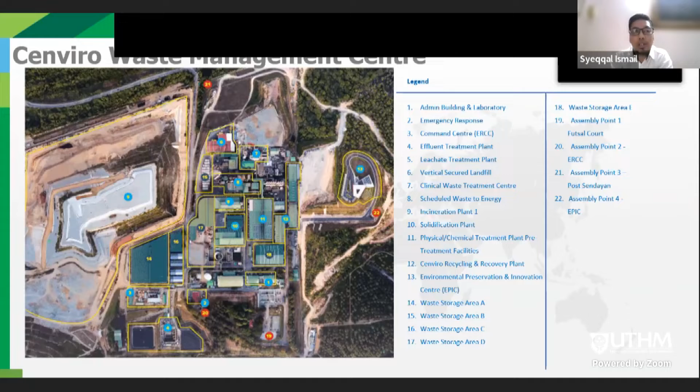And we are constructing 2 facilities. The first one is upscaling our waste oil recycling, and the second facility is our PET plastic recycling. Okay, that's all.

From company profile, any question?

Yeah, thank you, Mr. Syeqqal. I would like to ask you regarding the vertical landfill. Okay, because I also never heard that before. What does vertical landfill actually mean? And then the other one is the eco park.

Okay doctor, actually vertical landfill, if it's a normal landfill, we use airspace. So there's a piece of land, we dump the waste and then cover with soil, we bury it back. So after it's full, fully capacity, we can't use it anymore, because theoretically there's a certain height we can't exceed.

But because we cannot build another landfill in Negeri Sembilan, what we do is create a bund. A bund is like the Great Wall of China surrounding our landfill, the piece of land. We raise the wall high up so we can use the airspace.

76 out of 77, the largest facility in Southeast Asia. After that kita treat, kita storage, kita store, kita treat. So storage ni kita store dekat dedicated warehouse. Dia tak boleh, certain waste memang tak boleh terdedah kepada environment. Itu yang jadi sometimes terbakar, sometimes dia volatile. Ada waste dia volatile. Volatile means karakteristik dia akan meruap. Berbeza dengan vaporized, vaporized you introduce heat. Volatile dia meruap sendiri macam petrol meruap sendiri. So that one kita perlukan dedicated waste storage untuk itu.

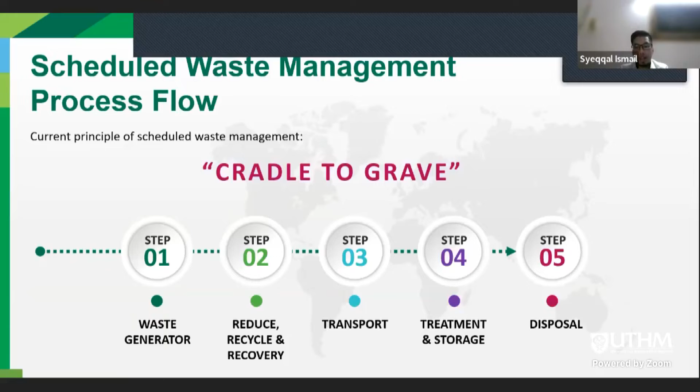And then after that, after kita treat apa semua, kita akan dispose ke landfill. This is example of scheduled waste punya facility in Malaysia. Saya ambil example is kualiti alam.

The waste generator akan try to reduce, recycle, and then they transport. Kalau waste tu on your left hand side, kalau boleh recycle, dia akan try recycle, baru dia transport. Tapi on your right hand side, kalau waste tu tak boleh recycle, dia akan straightly hantar kepada waste receiver. Receiver ni waste facility, waste treatment center. So residue daripada waste recycling ataupun direct daripada waste generator akan pergi ke waste receiver. Dia akan treat combustion tadi, incineration, PCT, neutralization, solidified, ataupun ada juga waste memang straightly pergi landfill kalau memang tak boleh treat.

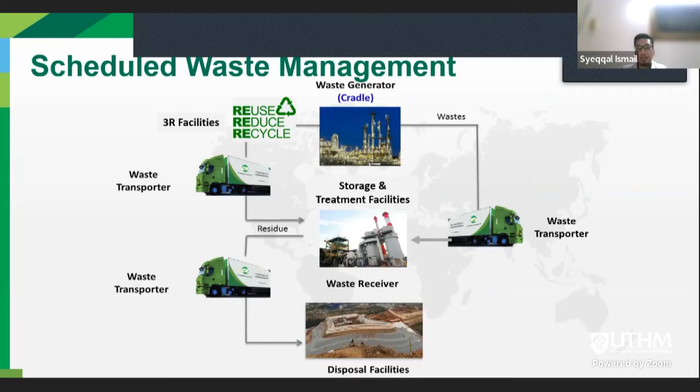After that memang kita akan hantar ke grave, ke kubur, tanah perkuburan, iaitu disposal facility, which is landfill. Okay, tapi currently we are transforming dari cradle to grave into cradle to cradle concept. Because waste generator ni bila dia produce waste, kita akan recover back the waste dekat on site. Means companies yang memang production is for consumer, dia tak payah fokus on recycle dekat facility dia, dia boleh hantar terus ke kami, ke Cenviro untuk kita recover back.

Kita akan buat the recovery, dan kita boleh tengok the economics of scale macam mana. Let's say the economics is good, maybe we can counter the price of cost untuk dia dispose, mungkin kita akan rendahkan. At the same time kita akan jual the recycle product tu kepada industri lain. So this is industrial symbiosis yang saya cerita dekat Dr. Mimi tadi. Kita try untuk recover the waste, kita try untuk reduce the cost of waste generator. At the same time kita buat symbiosis in industry.

So any other industry dia tak perlu untuk gunakan raw material. Sebab raw material ni let's say aluminium, kita nak mining bauxite. Bauxite tu dia perlukan energy, dia produce pollution. So currently my research and my planning for the future, saya akan extract the waste from aluminium, and we are extracting the waste and we provide back the alumina to the industry.

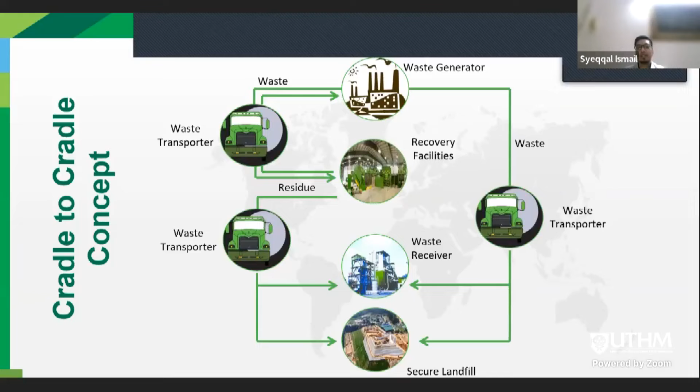That is the example, and after that we send it to the waste receiver, the treatment facility. Bear in mind, although we recycle and recover waste, it's not 100% recyclable, except organic waste. Since this is inorganic, there will always be some residue. For example, there might be other metals in the waste that we don't want to use, so we send those to a treatment facility like Kualiti Alam for them to treat and dispose of. This is an example of a recovery facility at Cenviro Recycling and Recovery.

So this is one example I'll give. The first one is waste oil recycling. We recycle lube oil - this is not waste cooking oil, this is scheduled waste. Lube oil, oils used in industry, like hydraulic oil at plants with mechanical parts using hydraulic mechanisms, we recycle that oil and produce, for example, reconstituted oil. This reconstituted oil is one of the fuels that CRR, Cenviro Recycling and Recovery, produces, which can be used for combustion. We can sell it to companies that use fuel in their combustion process.

The next picture is e-waste recycling. At CRR we partially recover the e-waste from, let's say, your handphone or laptop. Actually, in electrical and electronic devices there's gold, you know. So this is what we do - we recover precious metals like gold, silver, aluminium from your handphone, and after partially recovering, we send it for recycling to Shan Poornam in Penang for them to recover the components. Recycling turns it into another product, for example they produce an ingot, a gold bar.

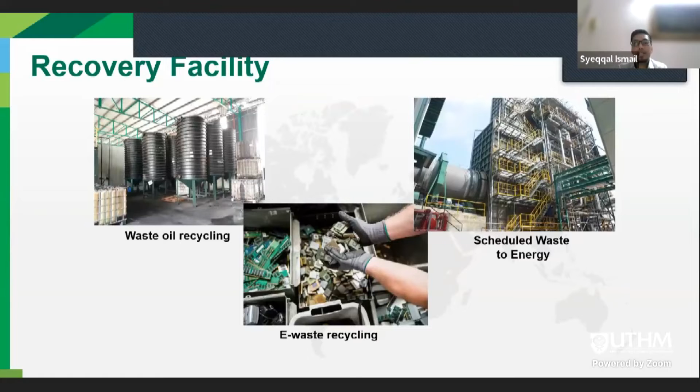The last facility is scheduled waste to energy, SWTE for short. This is, I think, the first in the world actually, because normally waste to energy internationally combusts MSW to produce electricity. But in Malaysia it's the opposite - we burn hazardous waste and produce electricity, and that electricity we generate is sold back to TNB for use in their grid, supplying housing areas so they can reduce their production of electricity. Because electricity production in Malaysia uses coal, which is not sustainable or environmentally friendly, we are trying to assist this to happen. We produce electricity and sell it to TNB.

Okay, this is municipal solid waste. This is actually the best thing, because I am a biochemical engineer, so my interest is in MSW, MSW treatment development. So from industrial sources they also produce MSW, residential like housing areas, and then commercial. Residential like your hostel can also be considered residential. Commercial like your campus, UTHM's campus, or a shopping lot - these all produce MSW.

So from this MSW, what can we actually do - we can recycle the recyclables. For instance, you can see there's aluminium cans, glass, paper - these are recyclable. Composting is actually a process for food waste, since food waste is organic and can break down into biofertilizer.

Later on we'll touch a bit on waste to energy. Like I said earlier, in Europe they use incinerators and produce electricity from municipal solid waste. But Malaysia is the opposite, we produce it from hazardous waste. So from that combustion, it produces electricity and generates it for the grid or for housing areas. And the last thing is actually landfilling.

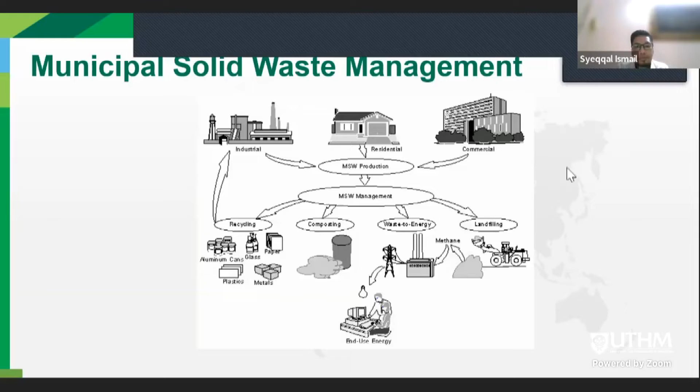So sampah-sampah tu last time bila you asingkan, lori truck datang. Sampah tu diorang masukkan sekali dekat satu tempat yang sama. And end up diorang tak buat apa pun, diorang masuk balik ke landfill. So actually apa yang kita buat, kita buat sorting tu adalah benda yang sia-sia.

Sebab kita dah sorting dah. Okey, plastik satu bekas, metal satu bekas, apa lagi? Kotak satu bekas, paper satu bekas. Tapi sampai kat truck, diorang ambil, diorang dump macam tu. So benda tu fail. Tapi the beauty of the process ni, dia boleh dump in everything.

Realisasikan aspirasi dinamis berkualiti. UTHM gemilang akan dijuang melalui aplikasi sains dan teknologi. Yakini semangat jati diri saing globalisasi demi agama nusa bangsa mendukung wawasannya.